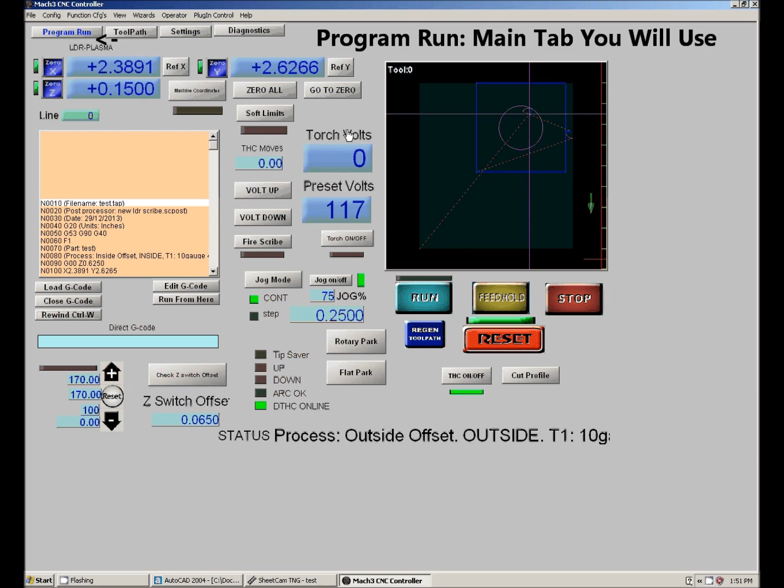All right, the plasma control program: everything can be done from the main screen. At the top here, you've got some tabs. These are considered tabs, these are pull downs. On the tabs, the only one you're going to use is Program Run. Any of these other tabs will be used when you're in contact with our company because you have a problem or a question, or you're changing settings on your machine.

For example, if you have an issue, we may have you go to the diagnostic screen. Typically, until you learn how the machine operates, you're free to use this, but you may not understand some of it, and there's no need to. To get started with, everything can be done right from the Program Run screen. The Program Run screen looks busy. Everything on here, though, is pretty easy to use, pretty self-explanatory.

First, we have our three main DROs, which are our current position of the torch in the X, Y, and Z coordinate system. You can zero each one of those independently, or you can zero all, and it'll zero all three of them. By clicking reference X, the machine will move until its home switch closes. Referencing Y, the same happens, except the machine moves in the Y-axis direction until its home switch closes. There is no need to reference Z with plasma because it does it every time it pierces when it finds the top of the plate.

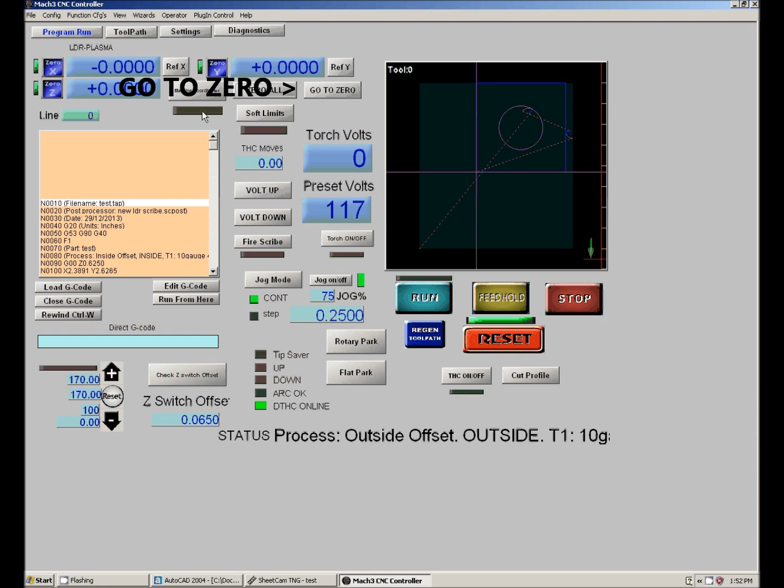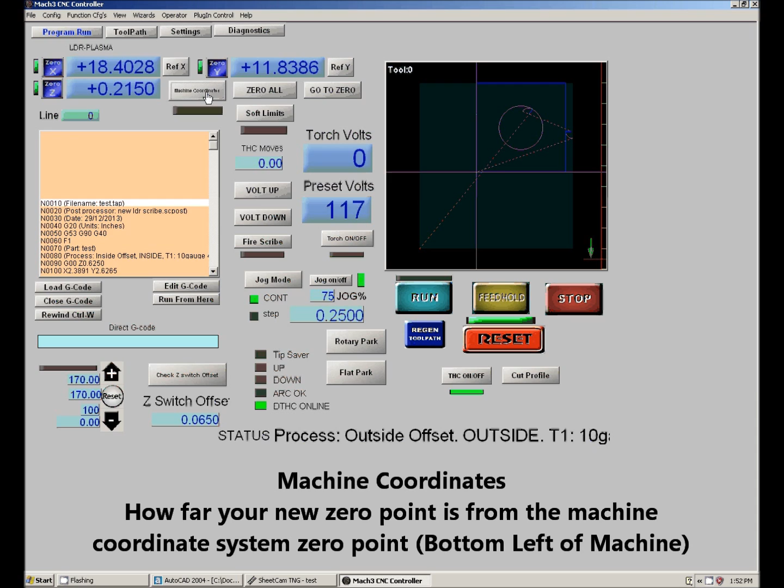Go to 0 will lift the Z-axis to a safe height from its last referencing point, and then will move the X and the Y-axis to coordinate 0. Machine coordinates: by clicking that, you can see how far your new 0 point is from the machine coordinate system 0 point, which is always the bottom left corner of the machine. Soft limits: if this is blinking, soft limits is on. If it is not blinking, you have shut it off.

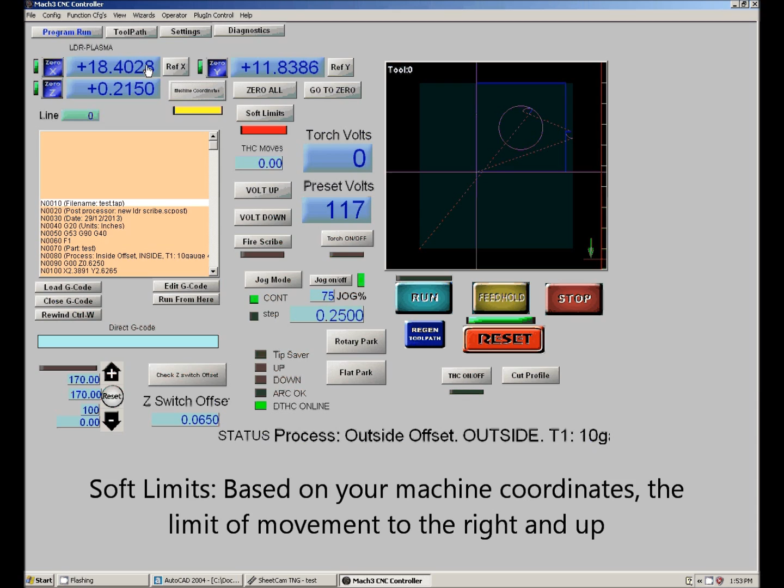Soft limits basically looks at machine coordinates, and it knows that it can move X amount to the right and X amount up. The reason I say X amount is it depends on what size machine you have. On a 5x10, for example, it'll move like 62 inches to the right, and 123 inches toward the rear of the machine. So with soft limits on, it says, okay, even though I'm really 0 where he wants to start cutting, I'm truly 18.4 away from the 0 point of the machine coordinates. So it'll look ahead and say, I can't cut this because I'm going to run out of travel. So it's actually a good thing to have on.

The people that have trouble with soft limits are people that forget to reference their machine, because if you don't reference it, the machine has no way of knowing where 0, 0 for the machine coordinates is, and then you'll trip your soft limits. But it can easily be turned on and off with this button. Once you load a G-code program, it is in this dialog box here. This shows you what line number you're on. This is the display for the toolpath, and as it goes down through, you will see that this will move. Dotted lines are rapid positions, solid lines are cutting movements.

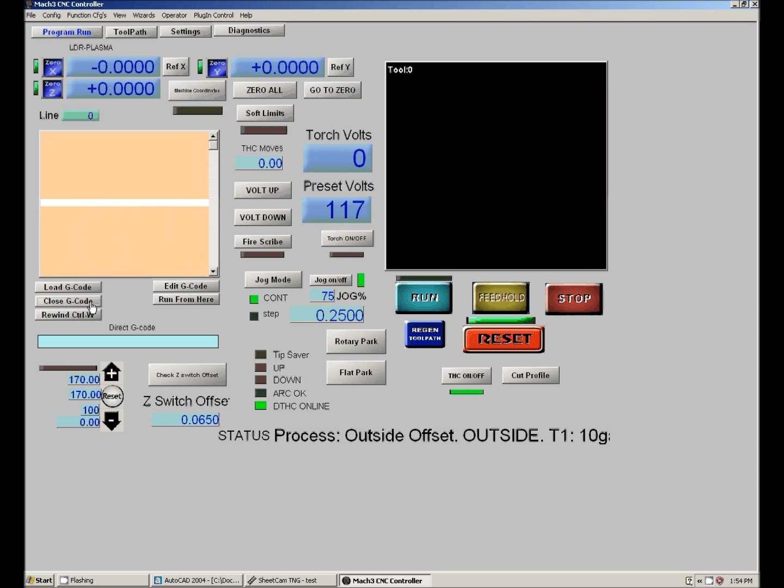Everything can be done right here or by the pull downs. Load your G-code, you can close it. If you're cutting part way through, you can rewind it. You can edit the G-code. If you understand G-code and you want to make a quick change without having to regenerate it, you can go in here and edit it. Run from here is not difficult, but with torch height control, it does change some things compared to a router, so it is covered in a separate video.

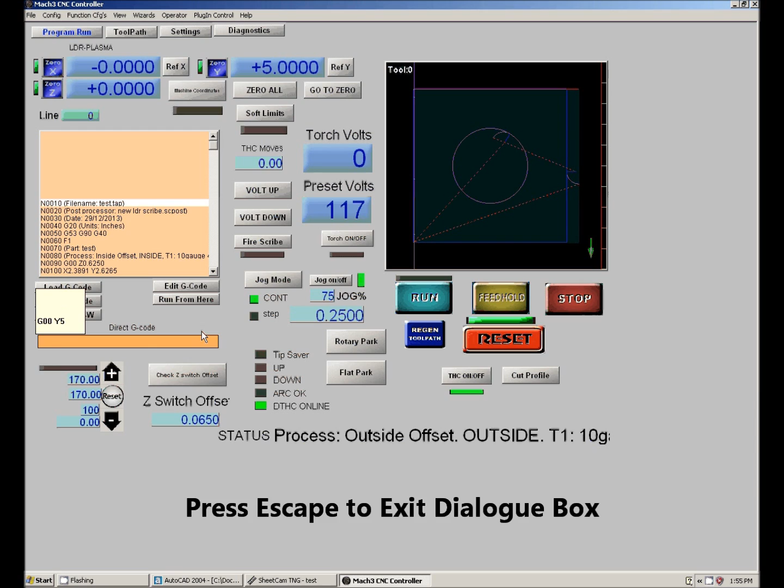Direct G-code input: if you understand G-code, you can directly type it in. So G00 Y5. I just moved the Y-axis 5 inches at a rapid speed. When you're done typing in, you need to hit escape to exit this dialog box before you can do anything else. Feed rate override: we're currently set for 170. That's based off this G-code.

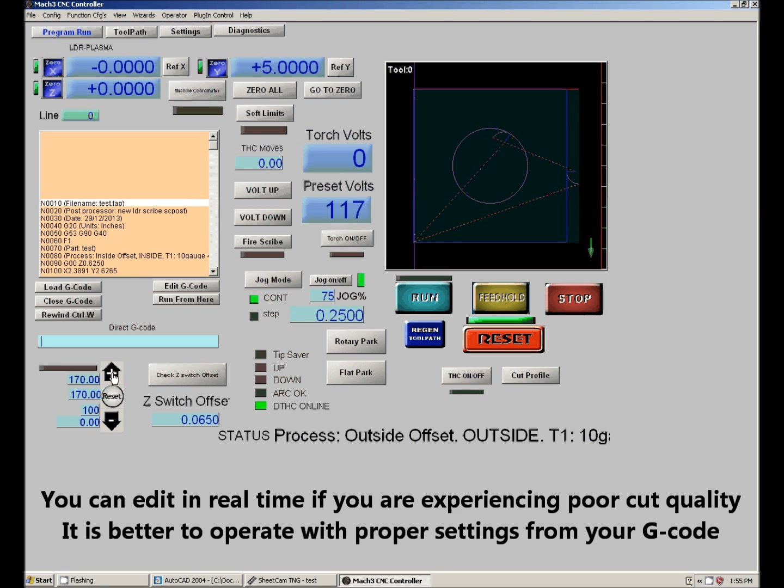You can bump that up if you want while cutting. You can do it on the fly. You can slow it down, then you can click reset, and it'll automatically go back to 170. This is to be used only on the fly. Really, it shouldn't be correcting any problems. It would be if you were cutting and it's cutting a bit poorly, you think it needs to be sped up a little to decrease the dross, or slowed down to decrease the top side dross. You can do that, but really you should try and get all your settings proper in the G-code. Checking Z-switch offset is also covered in another video and is extremely important. It's a must-watch video.

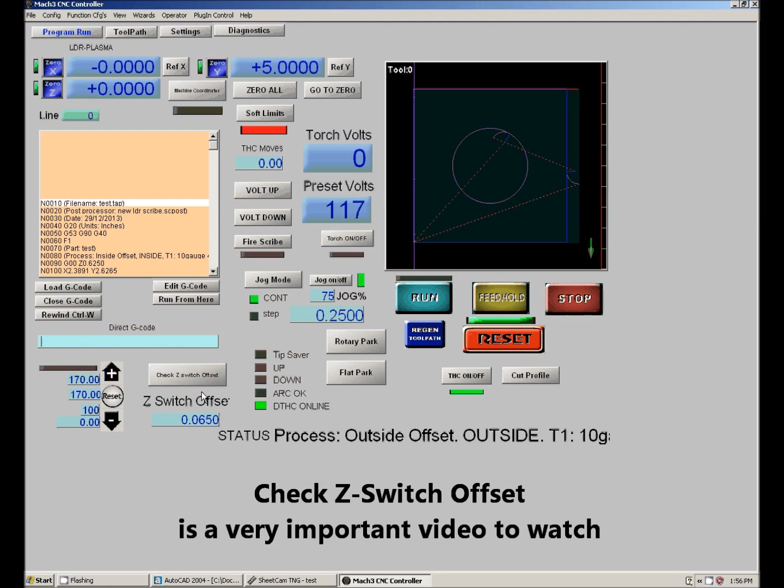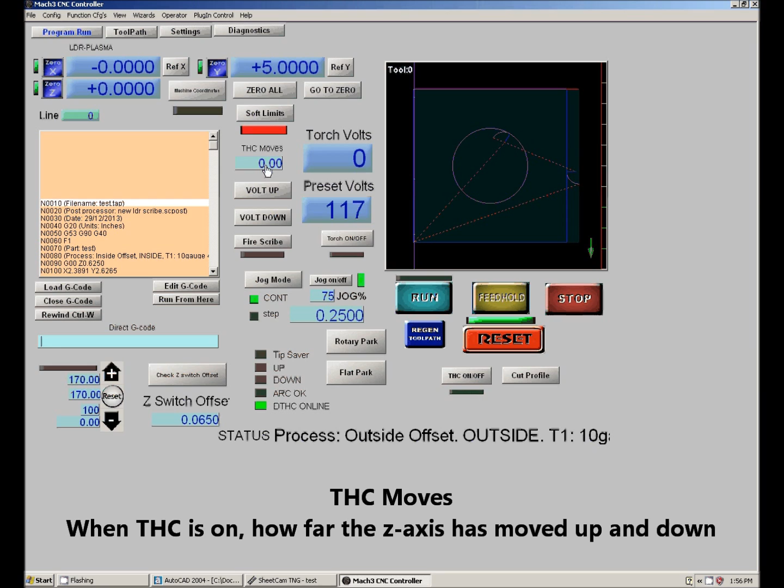It is the #1 setting for good quality cuts. Very important to watch this video. THC moves is when the THC is on, how far the Z-axis has moved up and down. Torch volts is actual torch volts. Preset volts is what we tell it we want to track. So that comes right from your Hypertherm or Thermal Dynamics manual, and it's set within the cut profile.

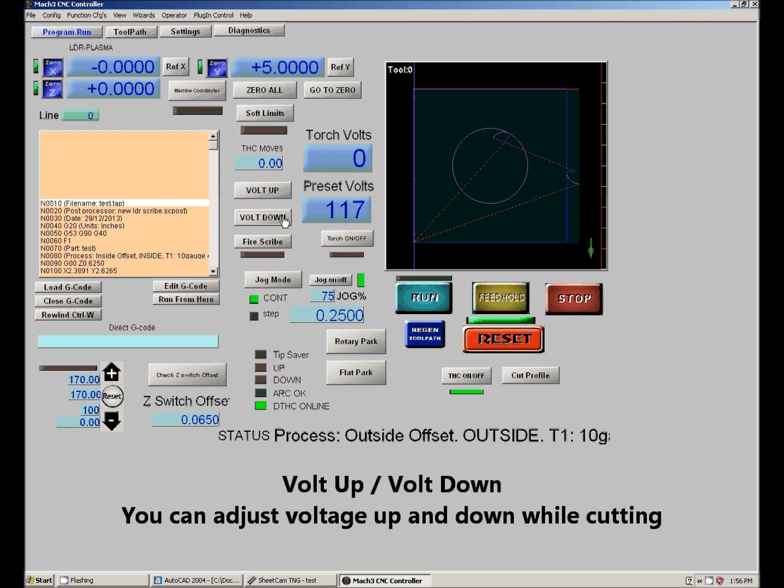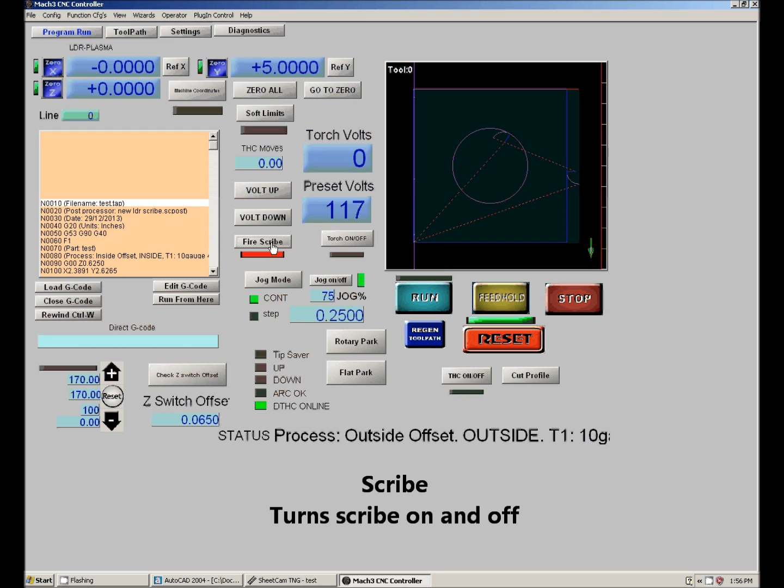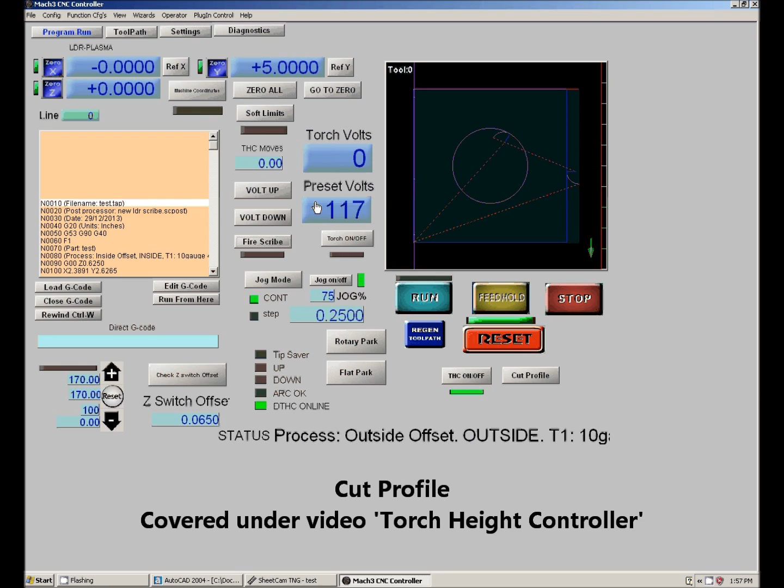Volt up and volt down: if while cutting you think that it's too high or too low, you can change this on the fly without having to stop everything. Torch on and off turns the torch on and off, pretty much only used for diagnostic reasons. If you have a scribe, this button would turn it on and off. If you do not have a scribe, this button will not be there. The cut profile and these two DROs and these buttons here are covered under the video torch height controller, so I won't go in detail, but they are covered under there.

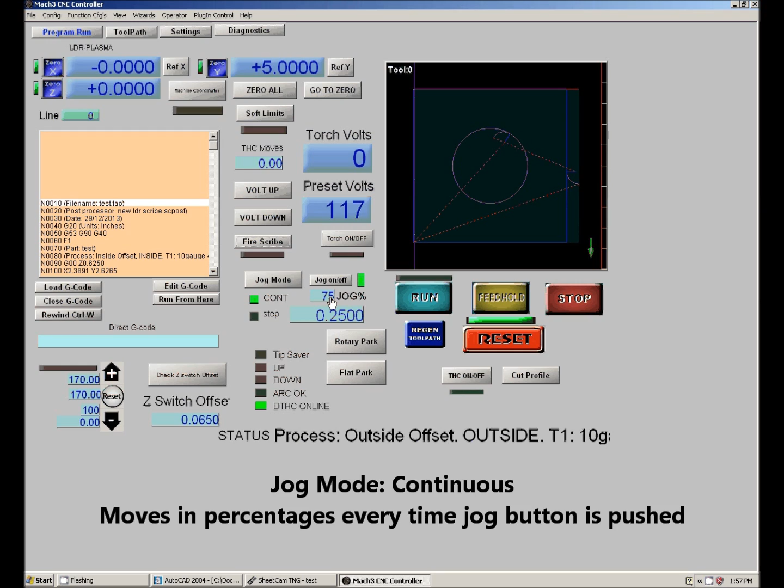Jogging, you have two different jog modes, continuous and step. Continuous: as you push the appropriate key, the machine will move at this percentage the entire time it's being pushed. Page up and page down control the Z-axis. Left arrow and right arrow is the X-axis and moves the machine left and right. Up arrow moves the gantry and the torch away from the front of the table toward the rear, and the down arrow moves it toward the front of the table.

Again, you can enter a number in here, just click in it, type in a number and hit enter. 100% would be the maximum. So as long as you're pushing one of those keys, it's going to move the table at 100% of jog speed. The next jog mode is step. Click on here, enter a number in here. You can enter 0.5. When you push a key, it's going to move ½ an inch. Okay.

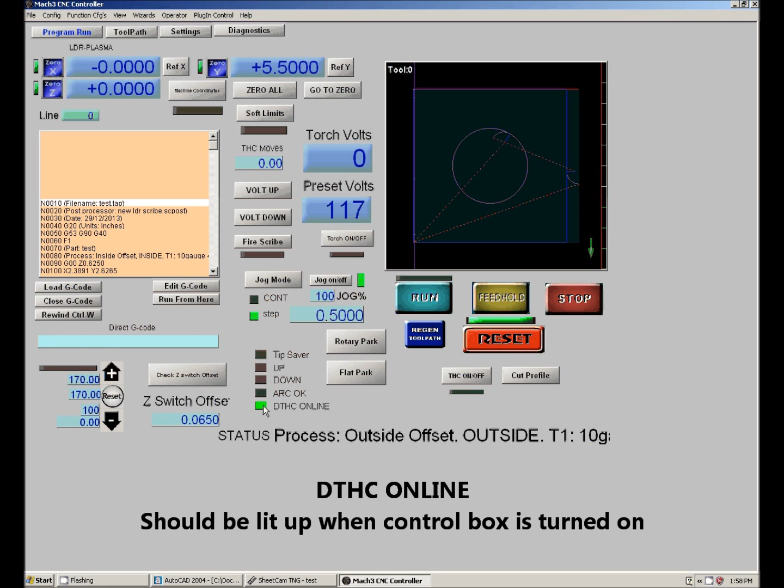These are just indicator boxes. DTHC online should be lit up when you turn the control box on. That means that it's communicating with the torch height controller computer. Once the torch fires and there's a good arc current flowing from the work clamp up to the torch, your arc OK light will come on. If while cutting it requires the torch to go up or down to track the voltage, these will blink. They happen very quick. You're not going to do a lot with it. Again, these are pretty much indicators to know that you're communicating.

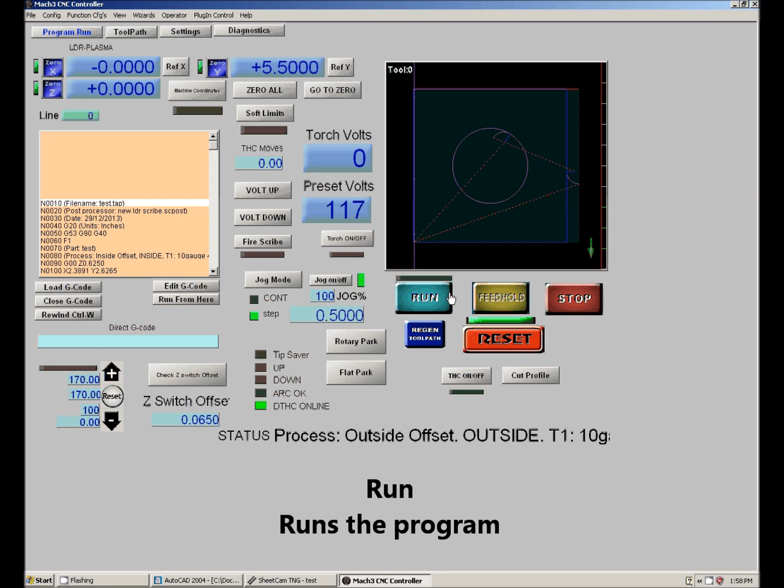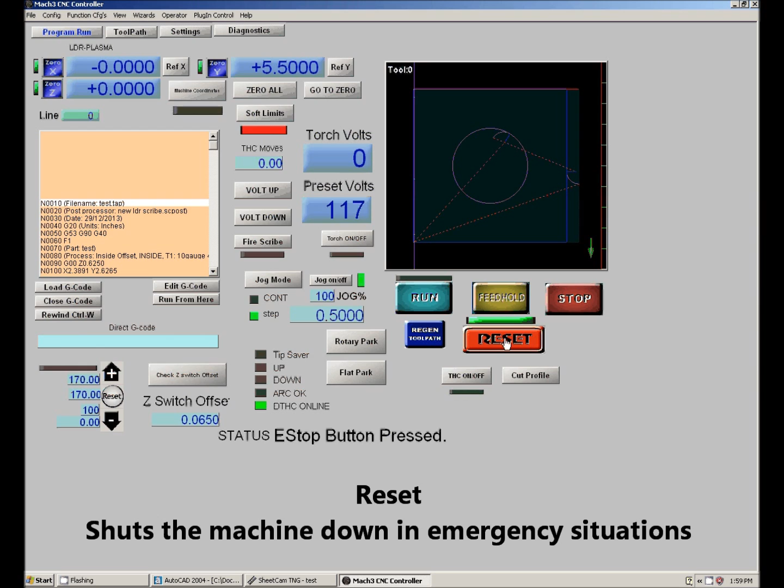Tip saver: if tip saver kicks in so that it won't keep tracking the voltage and it drops down a certain amount and then stops, this will kick on. Again, these are only indicators. Run obviously runs the program that you've loaded. Feed hold, stop, and reset, believe it or not, are all very similar. Reset is the same exact thing as hitting the emergency stop. All movement will cease. Torch will shut off. It's going to lock up. It's an emergency only type situation.

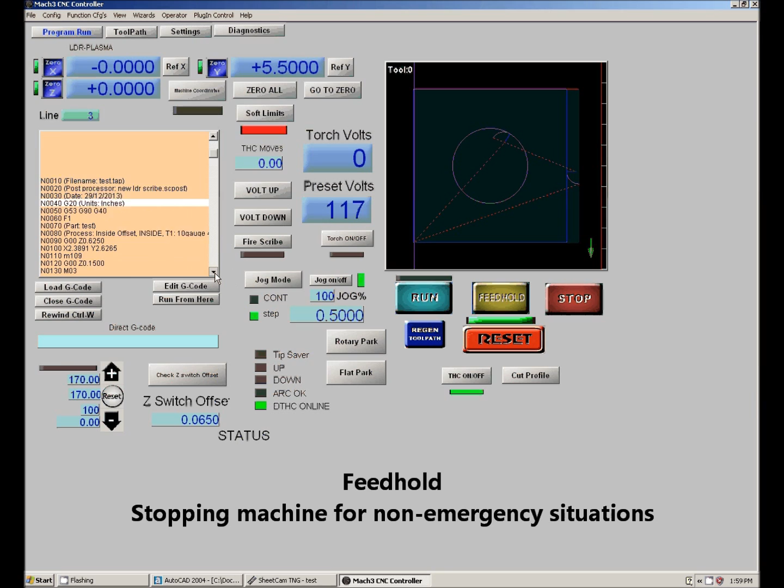Stop is, again, going to happen a lot quicker, but it's not the same thing as hitting an emergency stop. Feed hold is what you would want to do if you're in the middle of doing G-code and there's not a problem. There isn't an emergency. What feed hold will do is stop when it's done processing whatever line it's on. So feed hold, you're not sure when it's going to stop. You're just telling it, I want to process the line I'm on, but stop after that. Don't continue on doing the G-code.

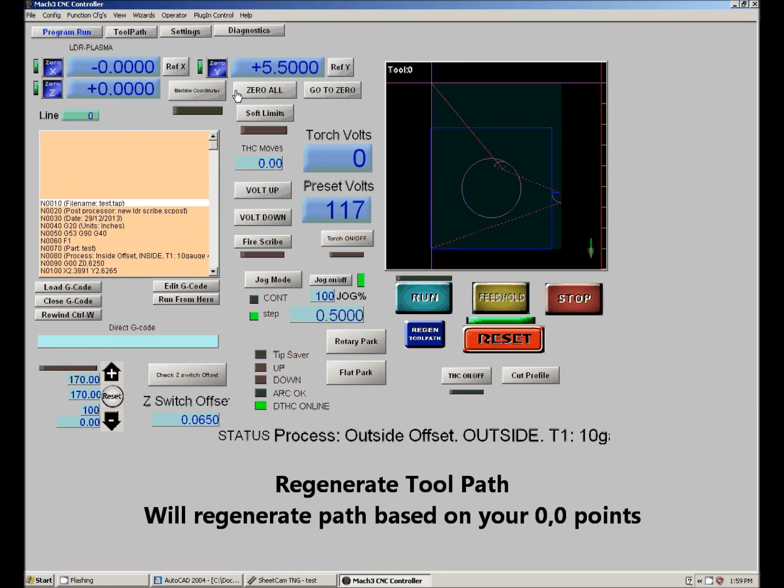Regenerate toolpath will regenerate it based on your 0 points where you set it at. For example, I'm at 5.5. So if I zero this and then regenerate the toolpath, you'll now see I'm back down here in the corner. So a lot of times when you've jogged way over and set your 0 point, your display will be really distorted. Just click regenerate toolpath.

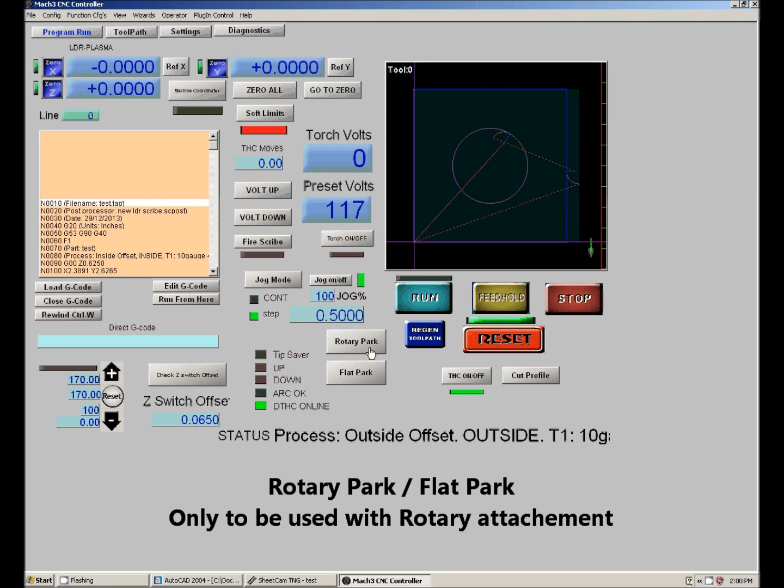Rotary park and flat park are only to be used if you have the rotary attachment. And you would click rotary park and then it will prepare the machine to park it over the rotary table so that it's in line with tubing.